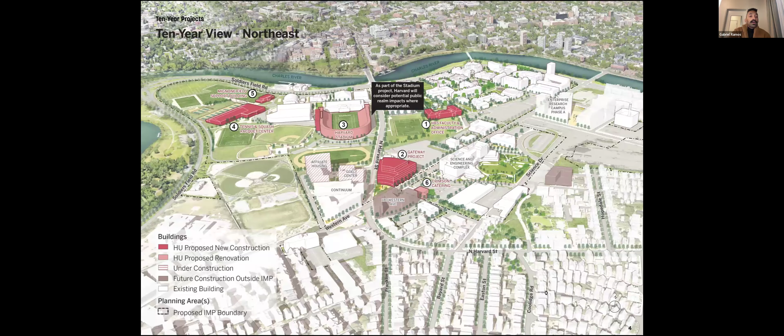Getting specifically into the inquiries of the BCDC commissioners, we see the athletics area here shown in context, really highlighting the Tennis and Squash Racquet Center, as well as the Mignone Field Support Building, which are essentially neighboring buildings.

On this map, we're highlighting the primary building entries in the orange arrow. You can see again the existing logic of how we sort of color-coded buildings based on existing being white, new construction being that darker color, and renovation being that lighter color.

Specifically for the Tennis and Squash Racquet Center, as it relates to the siting of the building, the goal here is really to maintain the existing court location and orientation, which is optimized for solar exposure, and to align new courts in accordance with NCAA regulation.

The court specifically that you see here on the map shown near that number 1, the goal there is to renovate the existing courts, which have that same orientation today. The goal is to renovate them in place. That then informs the building footprint of the Tennis and Squash Racquet Center, which really respects the existing orientation of those tennis courts as it is today.

Additionally, for this building, we're also thinking about development limitations based on easements in the area, as well as responding to the radial alignment of the Charles River and the overall sort of logic and structure of the athletics and HBS campus.

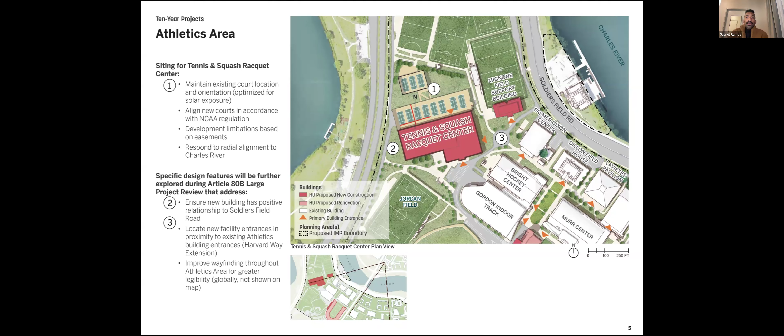Looking at the long-term view and context, this perspective shows how all the projects are sitting in their long-term context, with a lot of that additional build-out and development happening north of Western Avenue and south of the future HBS administration office building. Really here we want to emphasize a few things.

As part of these 2 new projects coming online in the Athletics Center, there will be an effort to promote placemaking and intuitive wayfinding by investing in key pathways that connect facilities, so that as these 2 new buildings are added to campus, there will be a very intuitive way of navigating this area. A lot of the core pedestrian corridors are already concentrated in those existing structures I talked about earlier. Again, we're thinking about accessibility.

So near Blodgett, the Blodgett steps, there will be some review of opportunities to enhance that to be more accessible for folks who are traversing the area.

Along with this long-term plan, specifically on Western Avenue, we'll be providing opportunities for porosity and visibility into the open space network of campus through a mindful placement of buildings and setbacks.

Additionally, the future HBS building, shown in that darker red, is really weaving itself into the existing context of the HBS campus and is in line with the existing height and dimensionality of those buildings. That new future development south of that is really responding to the HBS administration office building in terms of keeping that same height and proportionality.

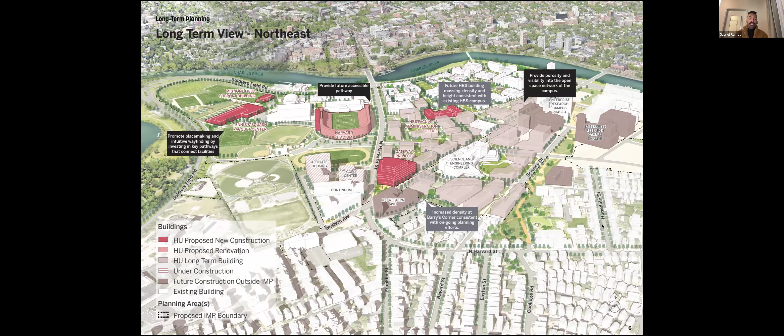The commissioners have also inquired about Soldiers Field Road crossings, and this graphic shows both planned and potential crossings. The first 2, 1 and 2, the Telford Street Bridge as well as Everett Street, are both funded and are in the works. The third one is a potential DCR future project, identified with that 3 near Smith Field. These align with the overall pedestrian corridors that exist today.

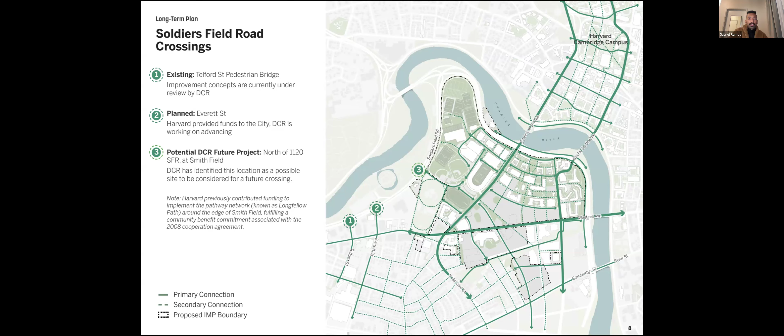Getting into the block plan for the long-term component of the IMP, we're really thinking about activating Western Avenue, shown with those dotted orange areas — those long-term development areas. That's the grain of development we're anticipating taking place there.

You can see we're identifying opportunities for porosity in those development areas, shown in that dotted green line, that helps indicate where folks will be able to veer off Western Avenue and into the campus, either physically or just visually, creating sight corridors for folks to look into the campus and see some of the activities taking place there, but also thinking about considerations for streetscape and public realm enhancements.

Additionally, in the athletics area, you see those red buildings, both representing Mignone Field and the Tennis and Squash Racquet Center, and those primary building entryways which connect to the existing pedestrian circulation taking place in the athletics area.

Really here, the overall idea with this block plan is to allow the campus to respond to its existing organizational structure, thinking about those radial axes as it relates to the different thoroughfares that compose both the athletics area as well as the HBS campus.

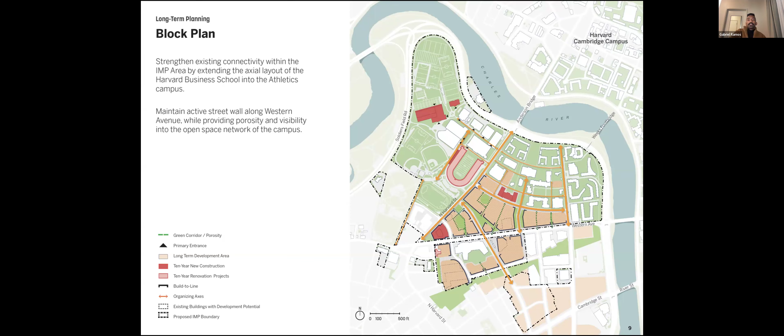So to summarize the presentation today, we heard from the BCDC interest in the siting and orientation of the Racquet Center. We've explained considerations for the proposed siting as it relates to its frontage in terms of the building entryways, but also its orientation. We thought about how those existing courts will be renovated in place and how that informs the building footprint shown on the map.

We've also explained that we'll identify design features to be explored in Article 80B Large Project Review as it relates to additional enhancements to how that building connects to the public realm adjacent to it, fronting onto Soldiers Field Road, thinking about ways of highlighting and activating that space, as well as providing clarity on the axial layout of the campus organization. The commissioners have also inquired about the Soldiers Field Road crossings, and we have shared a map and status update of planned and future possible crossings on Soldiers Field Road.

We have also dived into an illustration of the pedestrian network and wayfinding in the athletics area, updating the long-term pedestrian network to show those connections and to emphasize that those two new athletic buildings will be bookending an existing pedestrian corridor that connects to the existing athletic facilities today. We've also identified potential wayfinding opportunities to improve navigability in the athletics area, as well as providing additional context on the North Harvard Street crossings.

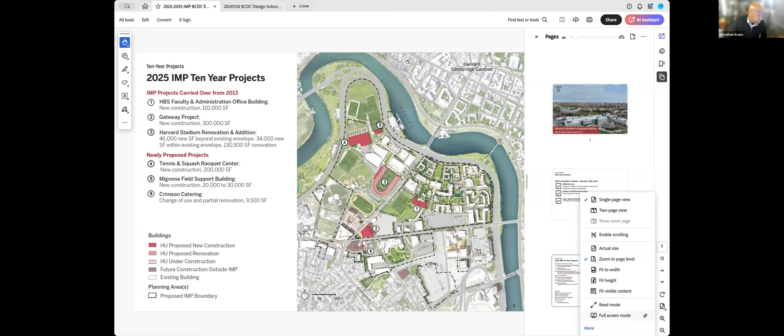Just at a high level, I appreciate the presentation. This is the first time I'm seeing this, so I'm sensitive to acknowledging kind of where you were, what you've been asked to respond to, and the clarity in which you've done that. I appreciate the diagrams in terms of street prioritization. I think they make sense in terms of how it builds off of what's there, reinforces the radial alignment of the river. I think there's a logic here that all seems pretty sound.

Again, I think this is all headed the right direction. I don't know, Linda, if you, knowing the project more, if anything you see that is worth chiming in on.

Yeah, I'm happy to. I wanted to give Kathy a quick voice. Kathy, if you wanted to add any of your comments. And you're on mute, Kathy. I'm still catching up in the presentation deck, so please go right ahead.

Okay, I do have a few comments, and I've been able to see this presentation a couple times and really appreciate you coming back. We always love it when you tell us what we commented on and then come back and tell us how you've had those internal discussions about those comments. So really appreciate you taking the time to create that chart.

When we last were in subcommittee in November, I think we were all feeling really good about the kind of master planning that was done east-ish of North Harvard Street. I wanted to go back to slide 9 that talks about the block structure. I think the concern was really in the area between the oxbow of Soldiers Field Road and North Harvard Street.

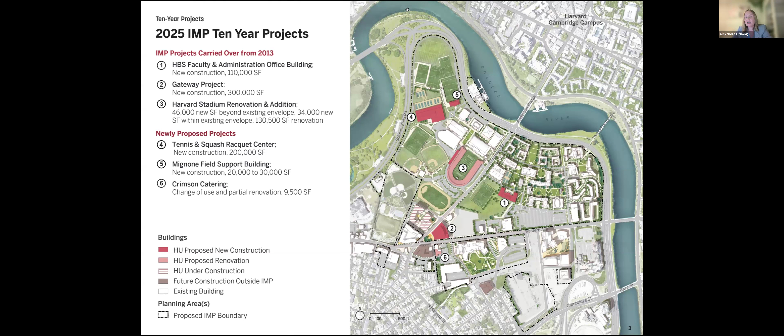The footprint itself of the tennis area, another part of it is just making sure that the entrances are engaging with that spine, that extension of Harvard Way we talked about, how that would be a clear path, with all the buildings oriented on that path, and making sure there are activity nodes that would ease the wayfinding into that area.

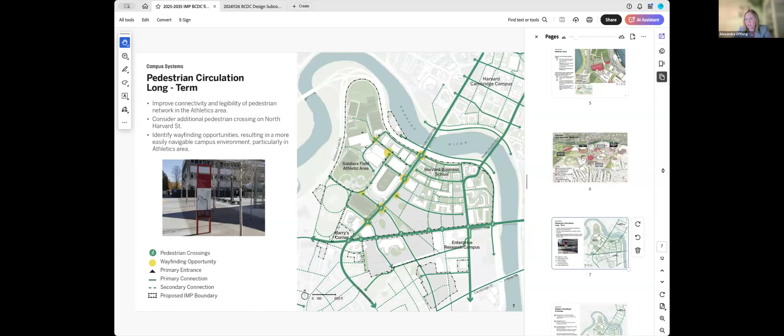I also wanted to point out that the university has established a wayfinding system through the Cambridge and Allston campus that you've probably seen. A few years ago we introduced this series of pedestrian wayfinding signs, just to make the campus easier to navigate. Each of these totems is customized for its place to ensure the maps and information speak to wherever you are on campus.

We've included a QR code on each of them so you can tie into the online campus map that facilitates routing and navigation and provides real-time information. As the campus changes and evolves, the intent is that we'd look at opportunities to expand the system and update the information. In fact, that's something we're doing right now as we look to the construction of the Goel Center, knowing that will be an area of interest, so making sure we include wayfinding that gets everyone there from different campus directions.

So I hope that helps a little to understand the thinking of how we took your comments to heart and really hashed it out, thinking about how we can improve the sense of place on campus, how we can improve the legibility of the campus. But also knowing the university has to have as few disturbances as possible to the many existing facilities, fields, and programs. This is like a jigsaw puzzle, there are so many moving parts, and we need to make sure we can accommodate all of our varsity sports going forward. So this is how we've been approaching it and really thinking through this. Thank you for all of your guidance.

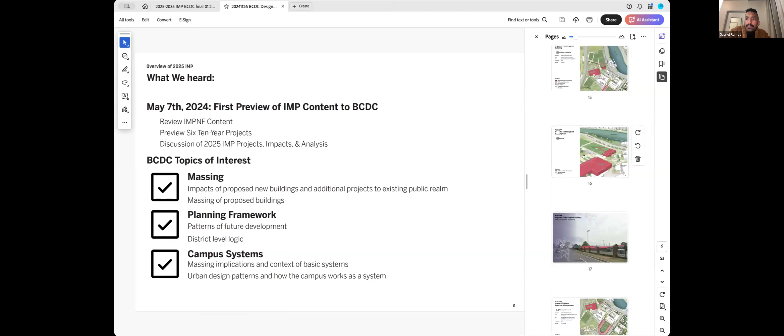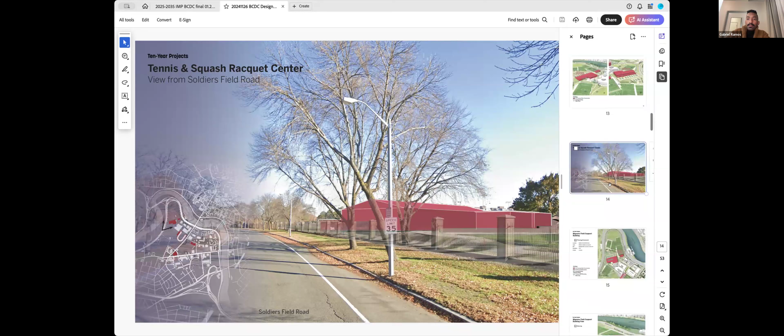And then I'll just flip back to the view of Mignone Field, which is quite close to the tennis and squash racquet center. I think this is probably a little bit more helpful in showing that edge condition between the athletics area and Soldiers Field Road. It's really just a fence and some landscaping.

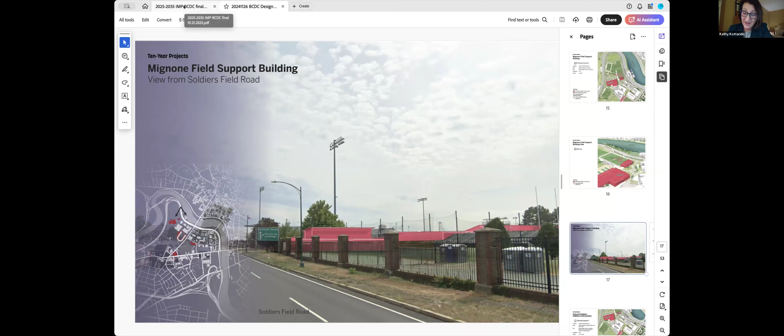Okay, not to switch gears, but I did want to compliment you on the other edge of campus, opposite the ART, and the focus on building some additional density and services there, and something of a gateway as well. I'm curious, it seems you're promoting more of a pedestrian link between the other side of the river and what will undoubtedly be a very busy art center, but I'm curious what the public transportation is likely to look like in terms of stops and things like that along the edge of North Harvard Street as you're getting beyond Harvard Stadium.

So we will continue to rely on Harvard's very robust shuttle network, which has multiple routes that connect various parts of campus and extend through different routing within Allston. We keep a close eye on shuttle demand and tweak our routes as needed, but right now there are multiple routes 7 days a week that access the North Harvard Street corridor to Harvard Square. That'll be the first line of access.

That's a university-serving shuttle, I imagine. It's university serving, but our shuttles are actually open to the public. Good to know. I was actually thinking much more of the public's use of the theater at the other end of campus and how the public will reach that fairly seamlessly. That answers my question.

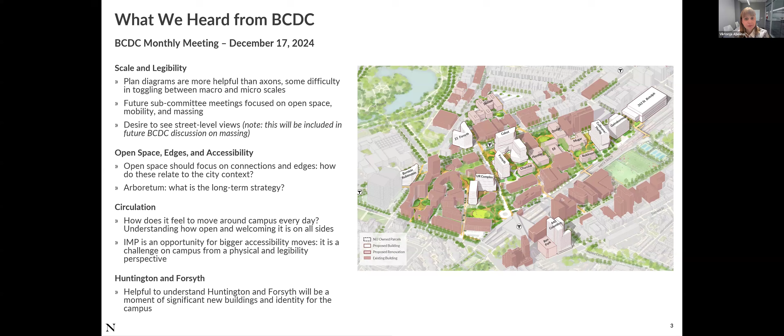Next slide, please. So the diagrams are small, but I promise the images will be larger in the subsequent slides. But it's really interesting diving into how the built form evolved.

Actually, the original location for Northeastern was not on the Huntington Avenue YMCA building, but on Boylston Street YMCA, which was damaged in a fire. However, that was our very original first stop. Subsequently we moved on to Huntington Avenue, which is where we built most of the more known, original, iconic white brick buildings. By 1960, most of the white brick buildings were completed. It was a Shepley Bulfinch master plan, and I'll walk through some of those images in more detail.

It's interesting because the campus evolved around quads, and you could almost suggest that some of the quads were not really connected to the other quads. However, the buildings were interconnected, not only above ground but also underground, which is a unique aspect of our campus. I'm not going to say it's the only university with underground connective tunnels, but it is a unique aspect of our urban campus.

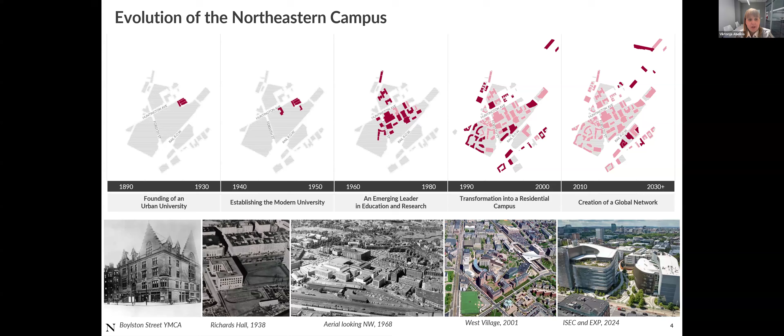But you see how it grows, and there's no open space, and it suggests that there's no context.

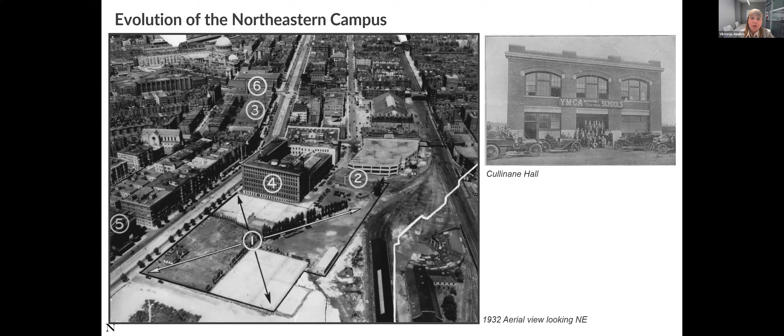At the time, the back, where the library is now, was really industrial uses for the rail. There wasn't an orange line at the time, just the train connecting to New York and New Haven, and the state was pulling back on some of those industrial uses. So Huntington was already defined, and then we slowly started expanding into what we now know as the Krentzman Quad.

Interestingly, this is Robinson, our first building, built around 1941 I believe. If you look, the Krentzman was actually facing Robinson along Huntington Avenue. The Krentzman Quad was then rotated to face Ell Hall, the building we now know as the taller building, the Flag.

But the space was always defined as the key open space. The building you see in the front was actually phase 1 of MUGAR, which is now going to define our East End research quadrangle. So those were the two original buildings.

Across Huntington, what you see is the Boston Opera House and the Boston Cold Storage Facility, an industrial use. Those two buildings were consolidated and torn down around the same time to become the white brick buildings for the residential part and the freshman dormitories.

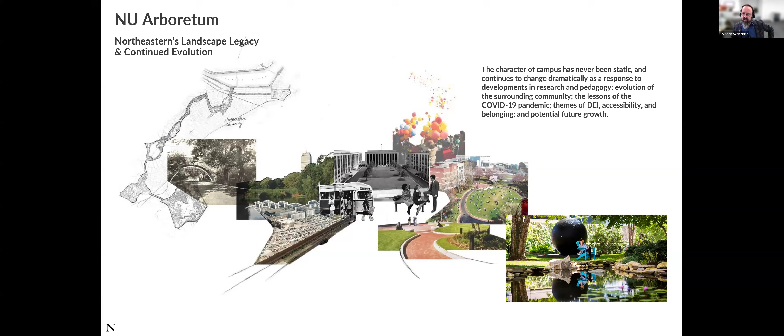I wanted to talk about the Arboretum. We're a relatively new part of the institution, becoming accredited in 2019, but it took my predecessor about 40 years to green the space to meet the criteria the ArbNet community requires. I'm very excited. In a previous life, I was at the Arnold Arboretum for 20 plus years, part of the Emerald Necklace. One fascinating part of my new job is tending and stewarding this green space, sandwiched between not just the Emerald Necklace, but the Southwest Corridor. It's a very exciting aspect of things.

Next slide, please. So...

When I came back on board to Northeastern in June of 2021, we created a vision. We wanted to take this idea of a curated plant collection in an urban space to create, connect, and inspire. That didn't just include our faculty, staff, and students within the Northeastern community, but reaching out to the external community to bring people and families into our space, and also to get out to their spaces and inspire them to preserve their urban canopy.

We like to think that we partner and work very well with Boston's urban forestry plan, working closely with Todd Mistor and Max Ford Diamond. We bat around a lot of interesting ideas to try and keep our urban landscape going. Next slide, please.

One of the things we want to do - we are a level 2 arboretum. Without getting into too many details, one criteria is that to achieve that level, one needs to maintain at least 100 different taxa. Taxa includes not just species, but varieties and cultivated varieties.

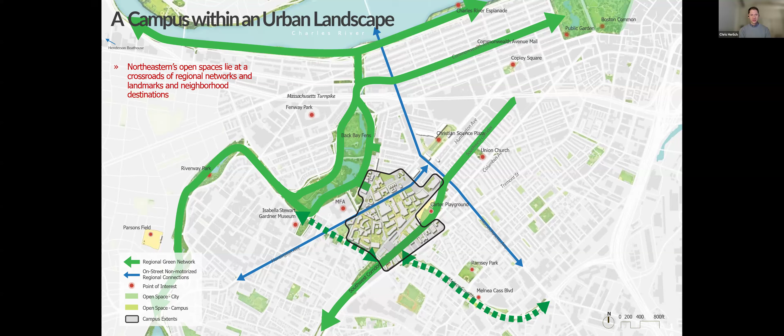Right now, our open space network is, we like to think of it as a series of interconnected, intimate rooms. It's not really a traditional campus. There are these signature green spaces that punctuate the paths and some of the important moments on campus. But most of our green spaces and open spaces have been created in a really piecemeal fashion, as things are developed building by building or acquired parcel by parcel. It accompanies acquisitions and redevelopment in a way that most campuses maybe don't, especially non-urban campuses.

So a lot of our spaces have developed from interstitial spaces. Historically they may have been parking lots, or maybe not even full parking lots, but places where you could stash a few cars or some service vehicles. As we've grown and incorporated those pieces into more of the heart of the campus, we've worked really hard to make them feel more connected, more part of something whole, and, continuing Steve's work, greening them as much as possible to make them beloved spaces that serve more than just service needs.

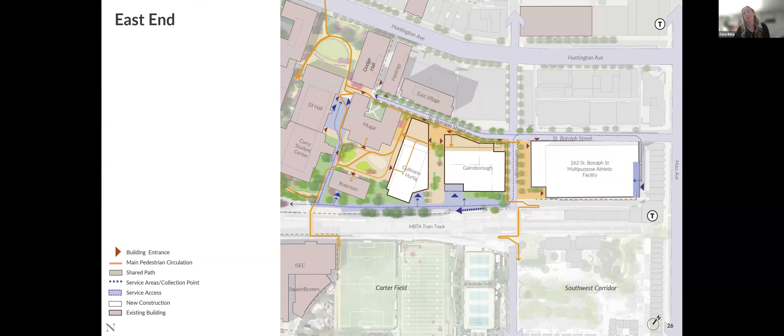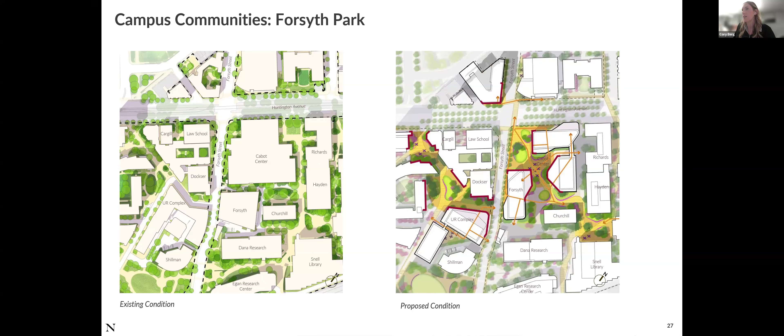And then here it is again in a bit more detail. I'll close with a comparison slide to open it up to discussion.

Corey, thank you. We don't often take the time to step back as you guys have, and you've done a great job giving us a retrospective, starting with those initial diagrams showing your evolution from around the 1930s and before to present day—that was really fascinating. And I can say that in the years I've been on BCDC, we've never had a director of horticulture join us. So Steve, thank you for being the first. And I hope not the last. It was just great to get all these different perspectives.

So I have a number of comments I jotted down as you all were going through your presentation. Commissioners, I think we're focused on open space today and on urban design comments around open space, so I wanted to open the floor to everybody and see what we have to give to the team.

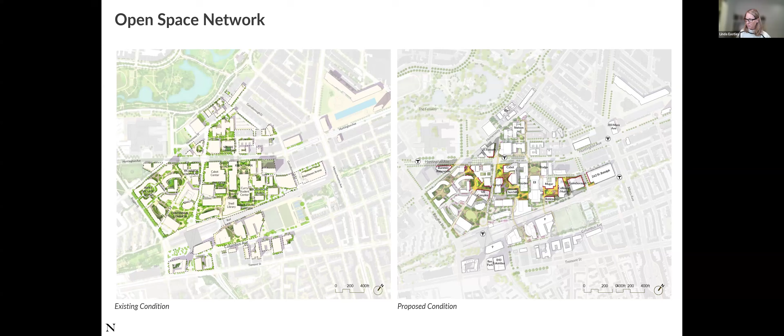But the one I'd love to understand better is the one at Hurtig Cullinane, where you talked about passing through that corner of a building through which one will be able to walk through in a fairly obvious way. I guess it wasn't totally obvious to me, so I'm wondering if maybe you could hint at what's happening there.

If I may jump in for this one—the biggest change we made here is one of the suggestions we heard last time, that we should push the Hurtig Cullinane redevelopment all the way to Saint Botolph to create a street edge, to really define Saint Botolph as an urban street. We liked that, and I think it makes a lot of sense with redevelopment of the arena and Gainsborough Garage, to really create a new spine. But we wanted that to also be public space that could be walked through.

So the way we imagine it, without fully designing the building, is that it would be one of the POPs—privately managed, publicly accessible—just an atrium. So it does create a street wall, but it's also an indoor covered open space that allows that kind of flow and connection out to Mass Ave past the arena or to the arena project. Initially we had it pushed back, and last time we came to BCDC there were a series of smaller plazas, and the feedback we got was that it felt like leftover space, and could we define the street in a more intentional way.

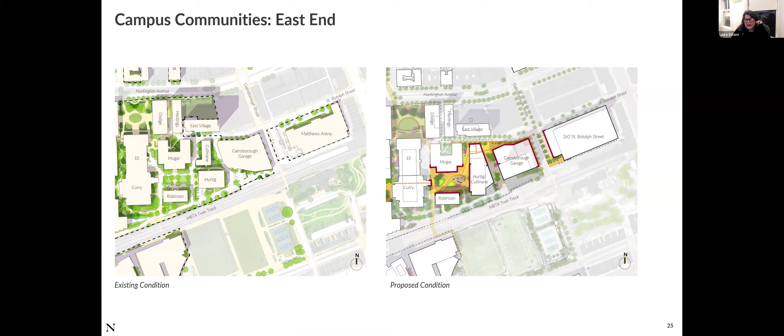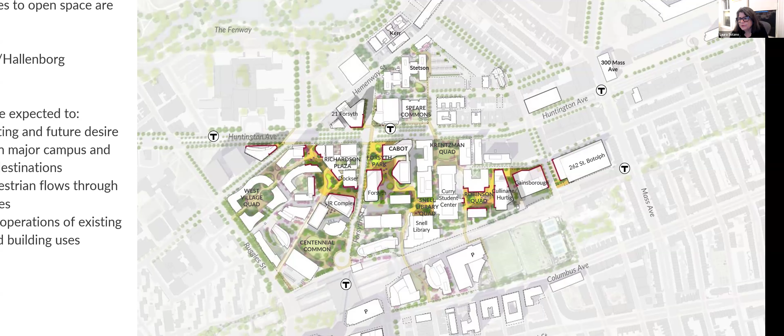Laura or Jonathan, could we look at a bigger plan, meaning more of the campus with the improvements shown, and maybe zoom in on that? I would like to hear, I couldn't help but notice when you were going over the different percentages for the different spaces on campus, it was hard to ignore the 33% or so service area. I wanted to understand how that works around the campus and its relationship to the open spaces you're proposing. Can I take this one?

Yes, Chris, go ahead. So some of that, as I mentioned, does include parking. There are two lots shown here, the north lot and the Ryder lot, which actually take up a significant portion of the overall service area. But what's important to remember about pretty much all of the remaining service typology is that they're shared, not exclusive to service vehicles. Some of them are popular pedestrian paths, even though that's not their primary use. So even though we're showing what seems like a large amount of service area, it is all accessible to pedestrians, and to date with essentially no conflict.

There are pedestrian paths that accompany them, whether it's sidewalk or something more dedicated, where trucks can access the buildings via a pedestrian path. Similarly, some of the connective pieces are open to service vehicles, so there's transferability between those two. One thing I wanted to point out is we're starting with 33% area dedicated to service, and we're going down to 27% service area according to the plans we're showing here. The nature of the service spaces does vary significantly, but the majority are open and accessible to pedestrians, even if their primary use is to make sure the buildings can be served.

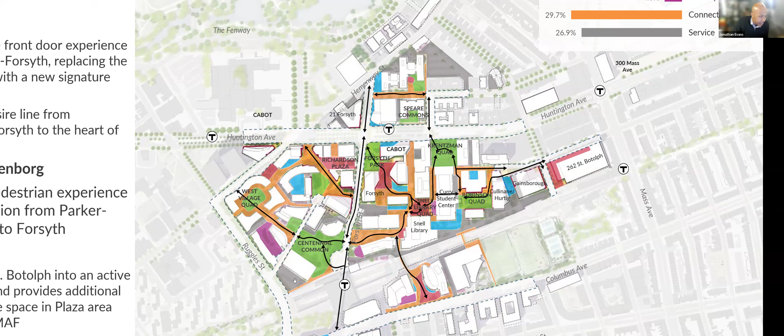Good point, yeah, thank you. I suppose quickly building off of that, one thing that I am struggling with a little bit is understanding the sort of pedestrian connections. And I'm looking at, I guess for me it's diagram page number 19, the one that has the kind of orange arrows, the sort of open space network.

And I guess I might have an older version, so I guess it's 22 on yours right now. One more. Yeah, that one.

I guess what I'm struggling with is it looks to me as if every path is a major pedestrian connection that kind of goes through the campus. And I guess, how are we using this diagram, or is there a better opportunity to just sort of create a clearer hierarchy?

I get it in terms of the darker orange is pedestrian and vehicular versus the lighter one is just pedestrian, but I guess I'm curious for a little bit more, maybe with an attitude about how to actually treat that streetscape to just sort of enforce an attitude of hierarchy, what makes one different than another.

How can we mitigate some of the conflicts in terms of vehicular traffic? And maybe that's a degree of detail that is beyond this level of what this diagram is trying to do, but I suppose maybe that's kind of what I'm looking at, trying to understand if there is an opportunity, and maybe there isn't, to create a clearer hierarchy.

I think I saw somewhere in the slides that people really love the sort of bigger, open, sunny signature green spaces. Does that then create an opportunity to use that to anchor a different attitude about what that circulation looks like to get there versus another path?

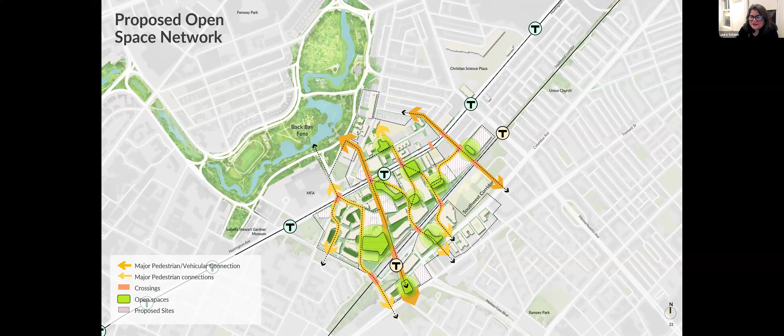The other thing I have to say, this is just bugging me, and it doesn't really mean anything, but could you go back to the plan that shows the future conditions? Yeah, that one's great. And if you could zoom in, not that one, the one before, and zoom in. So you've got these spaces.

Yay, I get to actually draw in these sessions, so my colleagues know that I like to do that. So you've got these spaces, right? And I understand that there's a cut through here, but things kind of peter off here. I don't know what you can do, but this is going to become this major draw to this end of the campus. And I would think as you're doing Gainsborough that you might really think about how you could strengthen that connection, because you don't know where you're going in the future. And so every opportunity that you can, as you add buildings on, the more that you can strengthen those connections, the better.

And, as a landscape architect, I just want to snip that building right there. And I'm not supposed to really be giving you that kind of feedback, but I like the way that these all kind of flow together, and not quite there for me on this end. And it's a lot of open space. It's an important connector.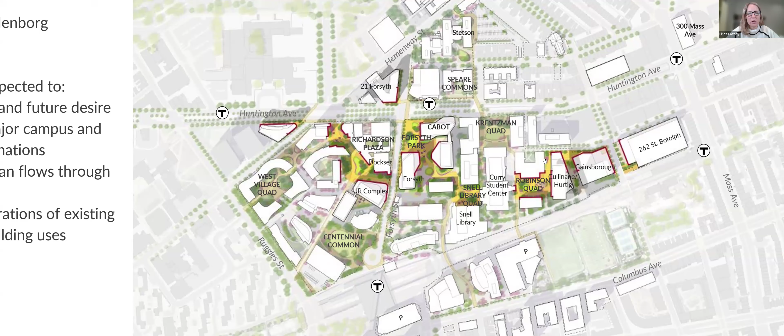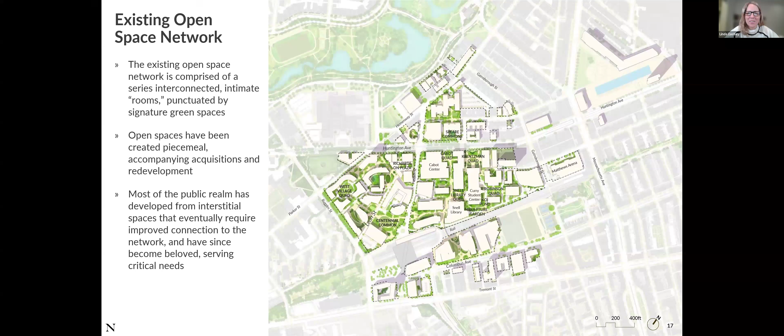Chris, when you put up slide 18, I have to say that it was my first real understanding of intentional spines through the campus. And I heard, Jonathan, your comment about why you need the black lines if it's clear - for me, it really helped to explain how you could get from

kind of something like this through the campus and have this really clear spine about how you move through. And I really like the idea that you layer your slides 18 to 22, so you're showing this, and then also showing some of those other directives and regional open space, because I think that is your powerful message. That is it, and I think it's compelling and clear.

And I think one of the things we were talking about last time was that the campus is confusing - you've inherited this really complicated urban condition. You look at this plan and say, okay, I could wiggle my way through this campus without too much trouble. But then you don't realize the grade changes, and you have to go through buildings to do this, and then, oh my gosh, I get to the corner of the library and I really have no idea which way to go. So I do think being almost extra intentional about where these pedestrian spines are will be critical to the success of the plan.

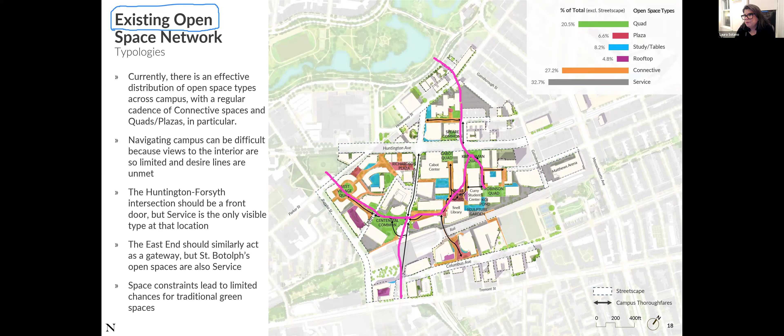Linda, could I just point out something quickly? You were drawing over the existing open space diagram as opposed to the proposed. Is that correct? There you go. There's our proposed. Okay, thank you. Yeah, I just wanted to make sure, Linda, that we were clear about that.

Wow, we got those to line up. Yeah, I mean, that's amazing. You showed it first on slide 18, and then you showed it again on slide 24, and I was kind of doing the toggle in my mind, and I'm like, no, the black actually stayed in the same place, which is pretty interesting. Meaning that your existing black lines, or the way that people move through the campus, actually hasn't altered that much through the ones that I traced.

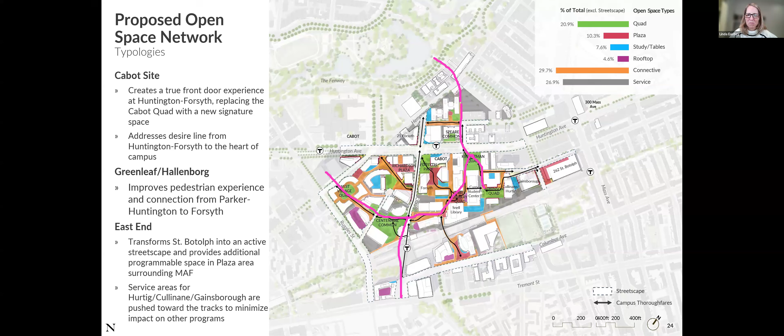But I think now the trick is, how do you make that feel more intuitive and connected? Which I think was kind of the subsequent comment about the connective tissue. But yeah, so for Hurtig, I wondered if we could look at the plan that you showed the last time we were together. And then I wanted, I don't know if it's possible, to just grab a little snip of what you're showing today, and look at them side by side if we could.

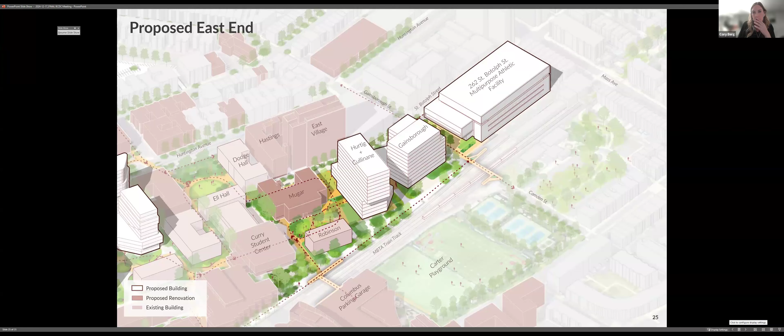So I believe, I'm sorry, this isn't going to be perfect. I believe this is what we were reviewing last time, correct? We saw it more in a 3D massing. Okay, we didn't see it in a plan view, is that right, Cory? No, there was a plan. This is it. Okay, great.

Because I think Laura was asking, could you nudge that backward and make the connection to St. Botolph a little clearer? And what I remember of the conversation is that we were ending up with all of these fragmented spaces. But I think the intent was, can we connect Robinson Quad to St.

Botolph in a way that's super legible, and I think by either pulling that edge back from St. Botolph or creating this permanent walkthrough. When you put that more recent slide up, I also got excited because I thought you were talking about maybe a double height pass through the building that didn't have doors, but I think that's not what you were describing later on.

But I do think that while having the street edge on St. Botolph was one of the asks from our last session, I think the other ask was that there was real intentionality about continuing in a really clear way this pathway that came from St. Botolph. Whether it happens because you've got two forms you can easily pass through and see through, know what's on the other side of, or whether a form gets pulled back quite a ways - I know that was the other thing we were toying around with. I think you guys are hearing us, and I appreciate the experimentation, and look forward to seeing where that ends up.